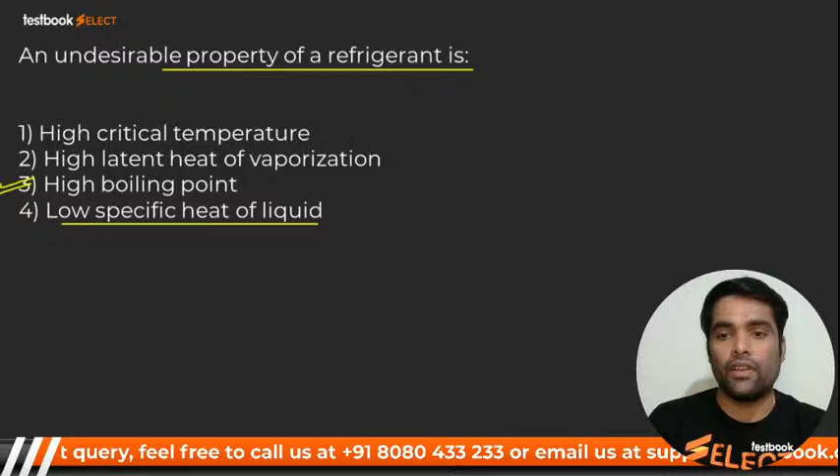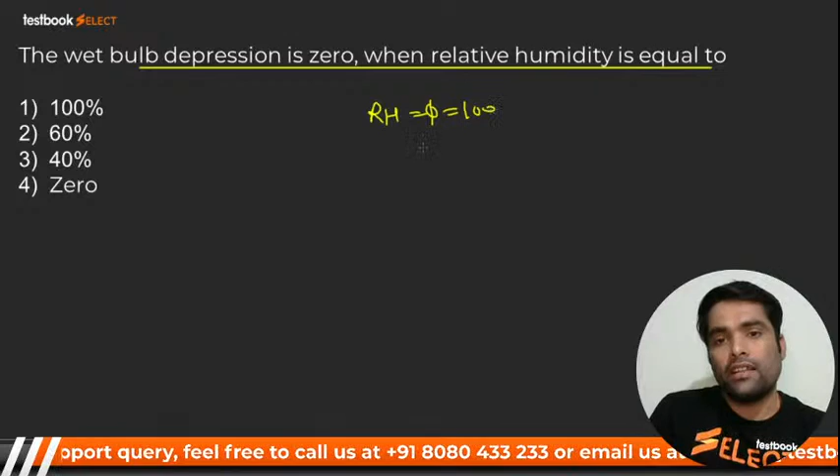Wet bulb depression is 0 when relative humidity is equal to, you know that, when relative humidity, that is phi, is equal to 100%, at that time dry bulb temperature is equal to wet bulb temperature, is equal to dew point temperature, DPT. And you know that wet bulb depression is nothing but the difference between dry bulb temperature and wet bulb temperature. So when your relative humidity is 100%, these both are equal, and you are getting WBD equal to 0. So it should be 100%. WBD will be 0.

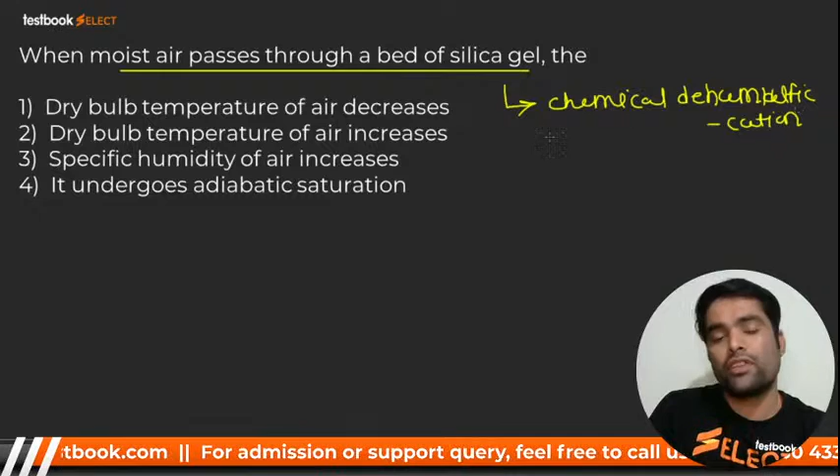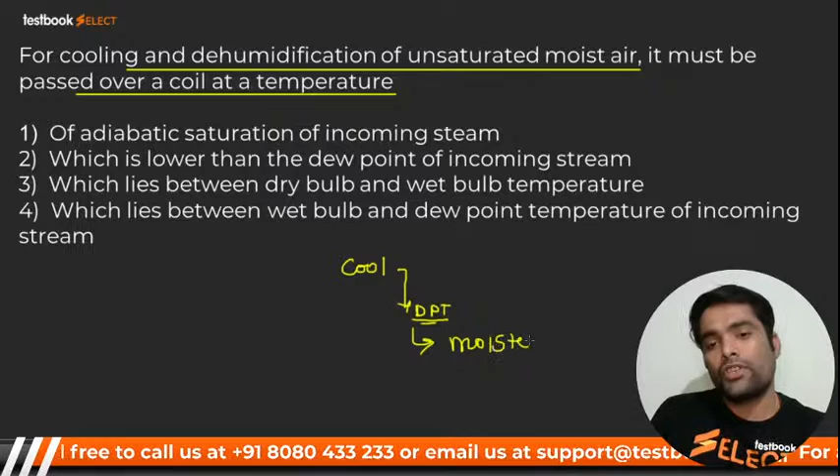You have to cool the air below dew point temperature. Why? If you cool the air below dew point temperature, the moisture will get separated. Moisture will start separation from dew point temperature. So if you cool it below the dew point temperature, you will get dehumidification. That is the answer which lies between, which is lower than that of dew point of incoming stream.

Very good. Here I go for next. Organic formula for refrigerant R12, it should be what?

You know that M-1 will be 0. And what about N plus 1? N plus 1 is 1. And you have the equation, that N, M, N and P. We have P. P is equal to 2.

N plus 1 is equal to 1, and P we have 2, right? Now you have Q. Q you can find out by N plus P plus Q is equal to twice M plus 2. Guys, yes or no? Had you got it? I hope you got it.

So N is 0. It is 2 plus Q is equal to twice M. M is 1, that is 2 plus 2, that is 4. You are going to get Q is equal to 2. So what should be your formula? C M H N F P Cl Q.

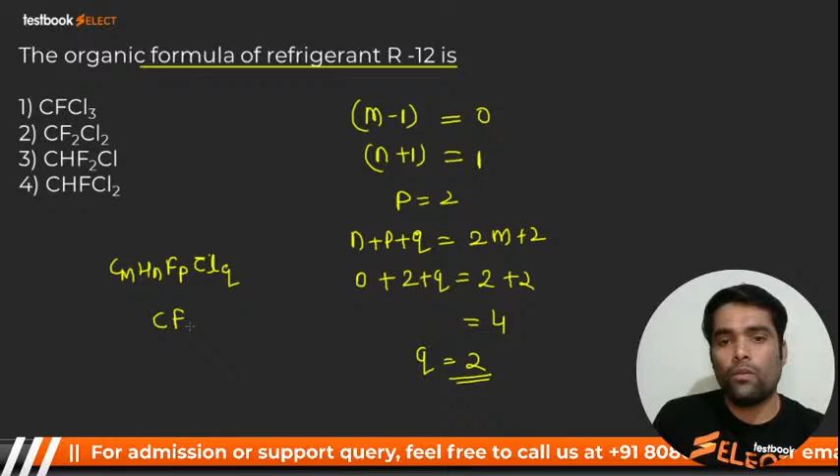C is what? M's value is 1, so C. H is 0, so there is no issue, H will be 0. N is 0, so no issue on that. And we have C F2, P value is 2. We have Cl, Q value is again 2. So our formula will be this one. Number 2. Very good.

Okay, we'll provide, don't worry. Domestic refrigerator, you are correct. Here we go for next.

In vapor compression refrigeration plant, the refrigerant leaves the evaporator. Evaporator means, you know this kind of diagram, I think there is no need of it, but still I'm drawing it. Right now bacha party, 1, 2, 3, 4. And it is evaporator, this is your evaporator. And this is condenser. So that is leaving evaporator, that means H1 is given, this is H1.

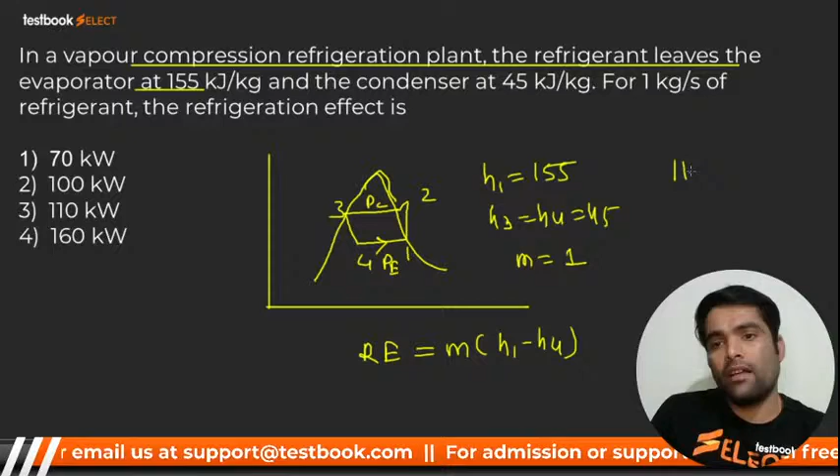Condenser and leaves the evaporator at this and condenser at 45. That means H3 is equal to H4 is equal to 45, for 1 kg. Mass flow is given 1 kg. So what is the refrigeration effect? Refrigeration effect will be nothing but mass flow rate multiplied by H1 minus H4. That will be 110. 110 multiplied by 1, that is 110 kilowatt.

I hope you got it. Very good, everybody. Here I go for next.

Oil separator is not required in refrigeration system if - when is it not required? Please listen, read the options very carefully. Refrigerant and oil are immiscible at all pressure and temperature. Refrigerant and oil immiscible at what, my dear? Condensation pressure and temperature, okay.

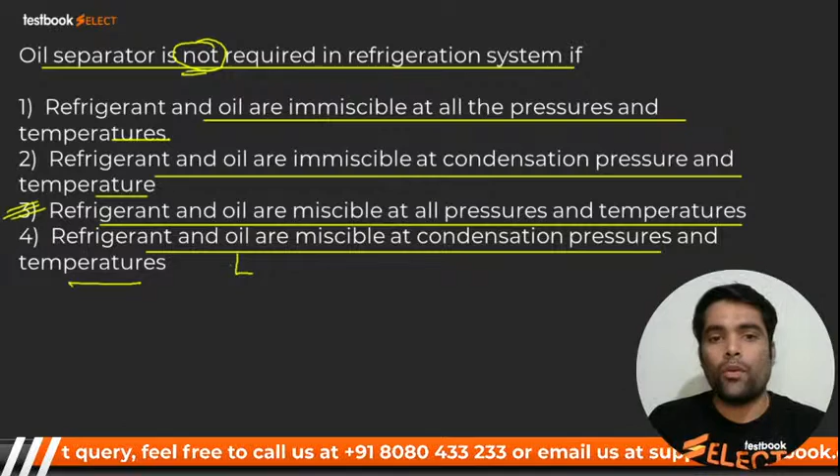I hope you got it. Here we go for next, my dear.

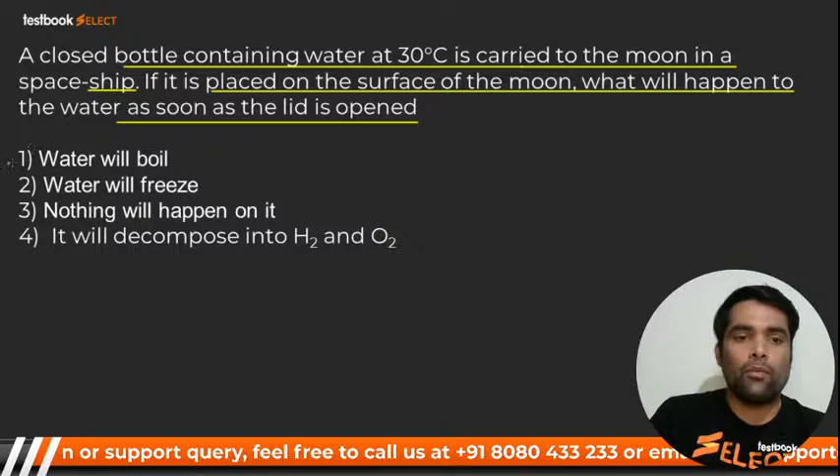Be fast, my dear. Very good, everybody answered correct - that water will start boiling. Water will start boiling, very good. Okay, here we go, it starts boiling. Very good, option number 1.

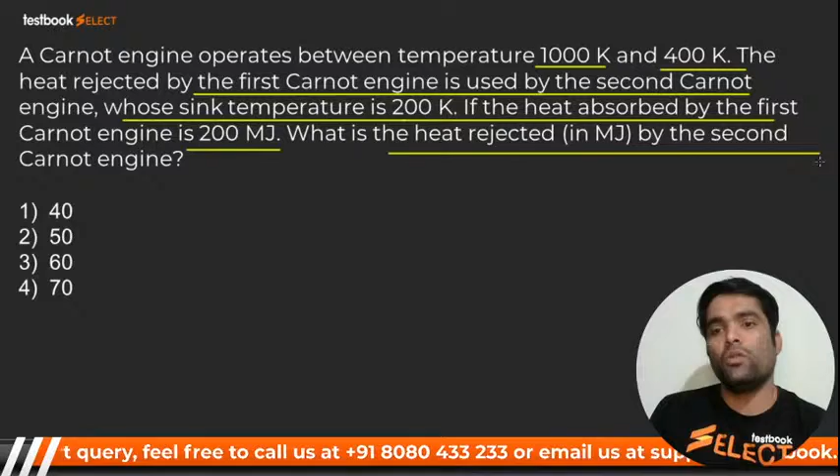Between what temperatures is it operating? This is 1000. A Carnot engine operates between two temperatures. The first Carnot engine's heat rejected is used by the second Carnot engine, whose sink is at 200. So the first temperature should be 1000, and this should be 400, and this should be 200. Heat coming in here should be Q1, then Q2 will come here with the engine in between, and here it should be Q3.

So can I write Q1 by Q2 is equal to T1 by T2, as it is a reversible engine. Q1 by Q2 is T1, which is 1000, divided by 400, that is 10 by 4, which is 2.5. Now, the first Carnot engine's heat absorbed is 200 megajoule, so Q1 is 200. 200 divided by 2.5 gives Q2. If it were divided by 25 it would be 8, so here it means 80. Q2 comes out to 80, so 80 has been supplied.

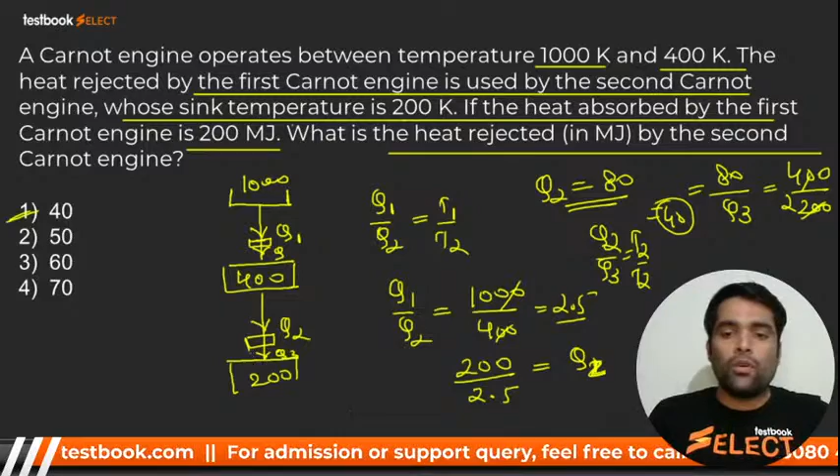Two spheres A and B of the same material, having radii 1 meter and 4 meter, and given temperatures. Which one of the following statements is correct? The energy radiated by sphere A is greater than...

Let me check, the answer is C. EA is sigma epsilon A T raised to power 4, so EA is directly proportional to A, and A is directly proportional to R square. So EA depends on R square and T raised to power 4. Similarly B will be R square T raised to power 4. So calculate EA by EB: RA is given as 1 by 4, squared, multiplied by temperature 4000 by 2000 raised to power 4. That gives 2, so it will be 16. It comes to 16, and for the other sphere it is also 16, so it should be equal to that of sphere B. Very good.

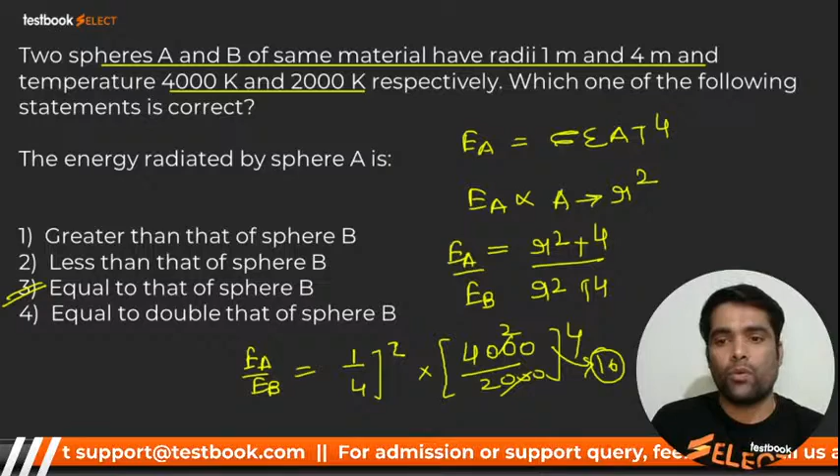Okay, definitely will provide. I'll try to provide that. Third will be equal. Okay, here I go for next.

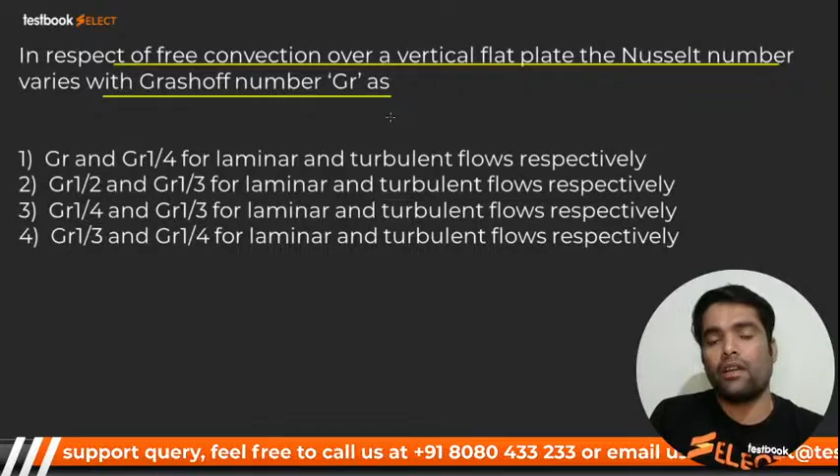In respect of free convection over a vertical flat plate, the Nusselt number varies with Grashof number as what, my dear? Nusselt number is nothing but C (GR PR) raised to power M. And this M is 1 by 4 for laminar flow, and M is equal to 1 by 3 for turbulent.

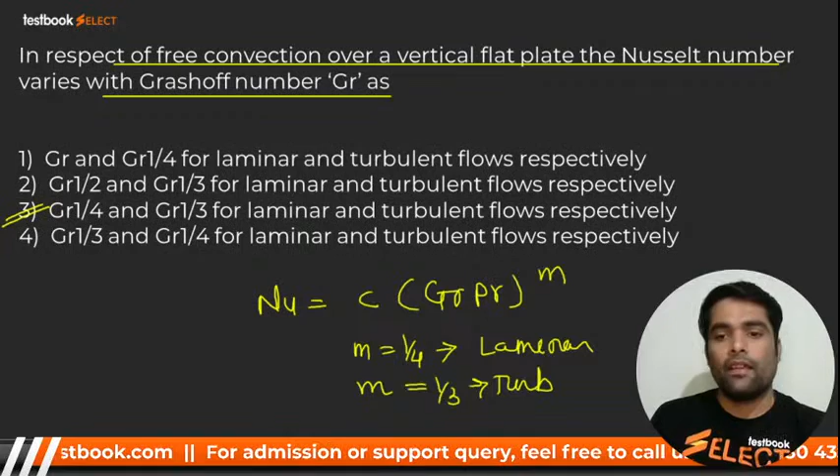So Grashof number किसके लिए बोला है? In respect of convection over a vertical flat plate, Nusselt number varies with GR raised to power 1 by 4 for laminar, and for turbulent, this one. Number 3 is correct. Very good, everybody. If you know the formula, you can crack the question.

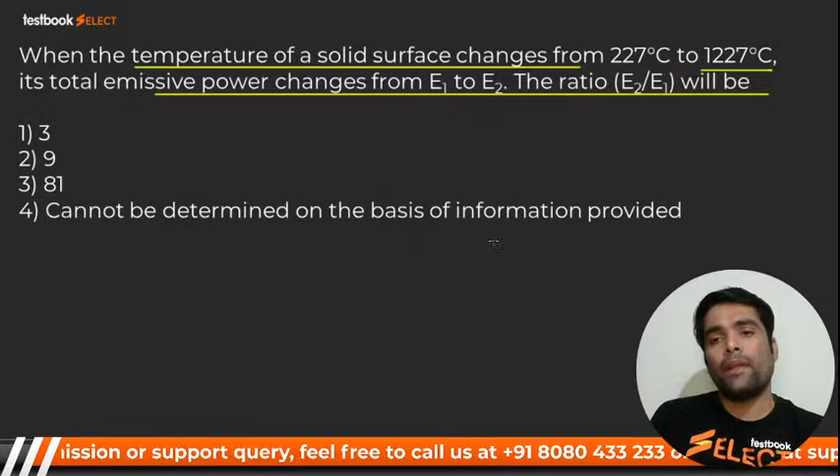When the temperature of the solid surface changes from 227 to 1227, its total emissive power changes from E1 to E2. The ratio E2 by E1? 1227 plus 273 is 1500. E is directly proportional to T raised to power 4. And 227 plus 273 is 500. 1500 by 500 is 3, and 3 raised to power 4 is 81. So E2 by E1 will be 81. Everybody is correct. Very good.

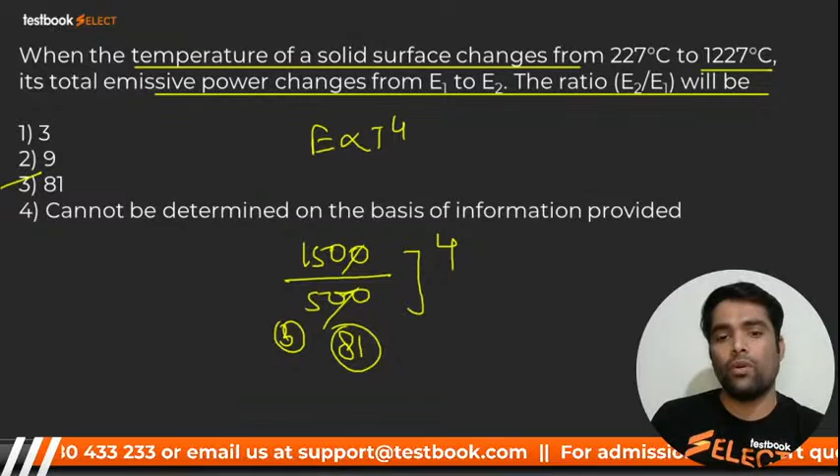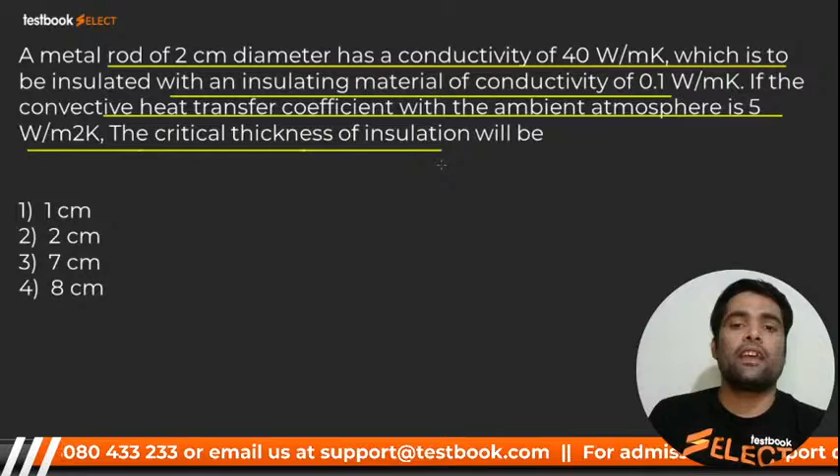Metal rod of 2 cm dia has a conductivity of 40 watt per meter Kelvin, which is to be insulated with an insulating material of conductivity 0.1. If the convective heat transfer coefficient with the ambient atmosphere is 5, the critical thickness of insulation for a cylinder: it should be K by H. K is 0.1, H is 5. कितना हो जाएगा बच्चा ये? Guys, yes or no?

It should be 0.02 meter. That means 2 centimeter. But they have asked critical thickness. So I have to minus the radius: 2 minus 1, that will be 1 centimeter. It's not 2 centimeter. They have asked critical thickness of insulation, so 1 centimeter is the correct answer. Here I go for next.

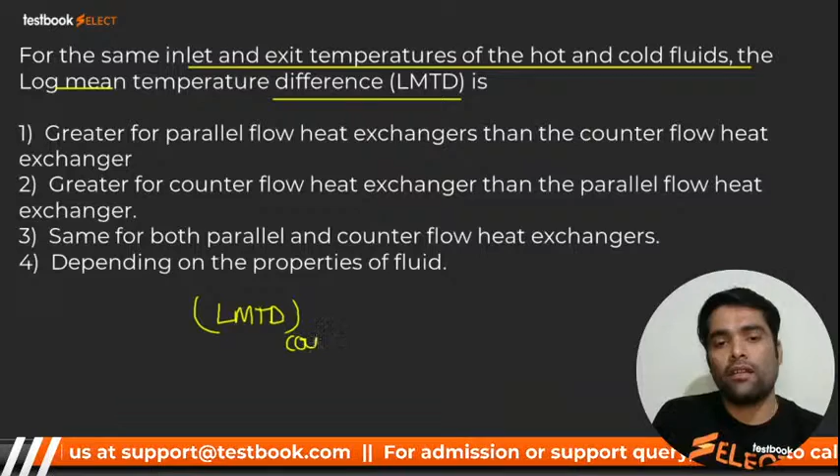For the same inlet and exit temperature of the hot and cold fluids, the log mean temperature difference, LMTD, for counter flow is greater than cross flow heat exchanger, and greater than parallel. Parallel का सबसे कम होता है. So it is greater for the counter flow heat exchanger than parallel flow heat exchanger. Number 2. Very good, dear. Here I go for next.

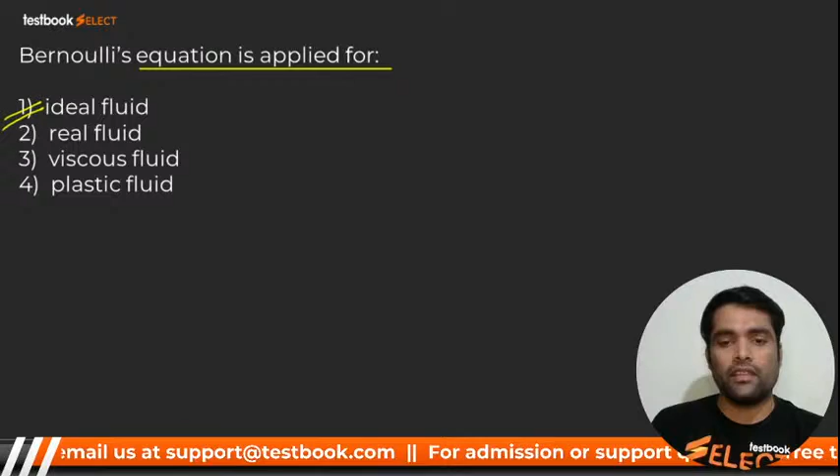Here I go for next, my dear.

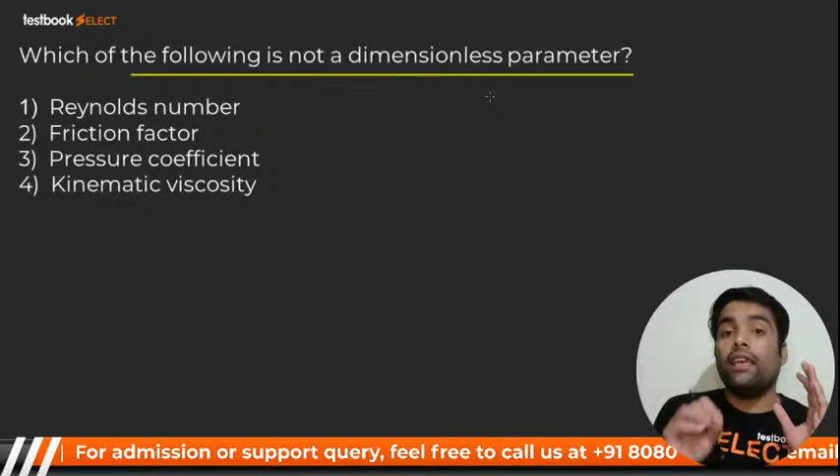Reynolds number is dimensionless, friction factor is dimensionless, pressure coefficient is also dimensionless, right, my dear? Kinematic viscosity, you know that it has dimension: meter square per second, right? So the option will be number 4. I hope you're getting it. Very good, Jaswant.

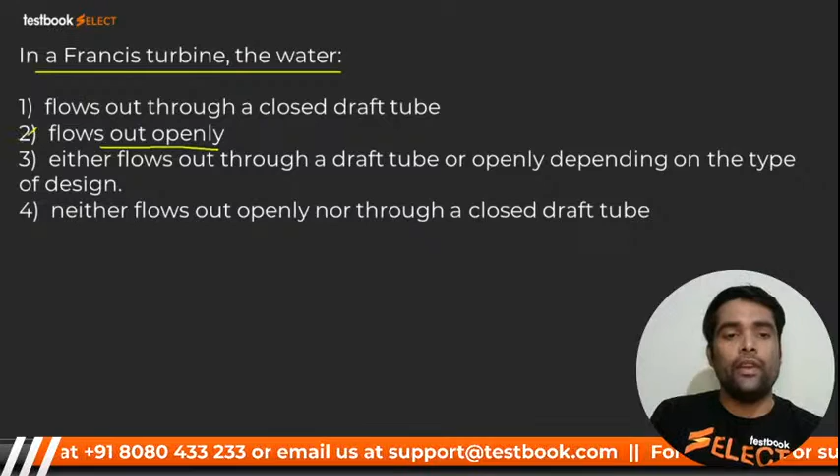In a Francis turbine, the water flows out through the closed draft tube, or flows out openly? It's not possible, because it has some pressure, and that we have to convert. Either flows out through the draft tube or openly, depending on the type, or neither. It should be none other than number 1. Yes or no? Guys, please tell me.

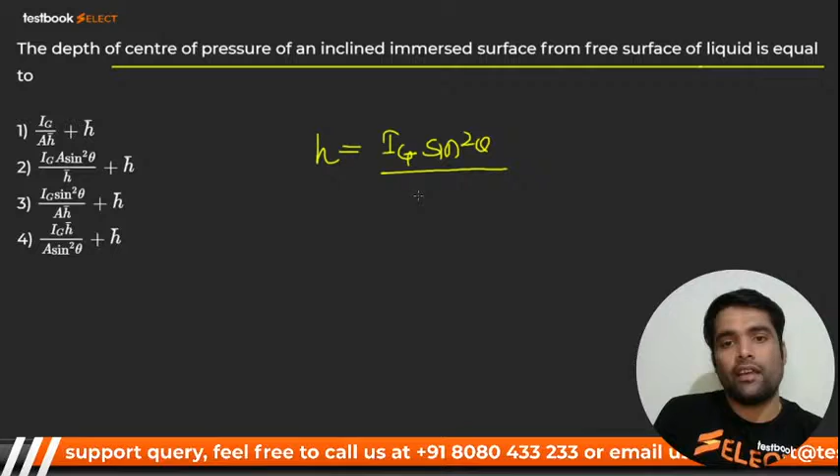The depth of center of pressure of an inclined immersed plane surface from free surface of the liquid. It is none other than what, my dear? H is equal to Ig, that is moment of inertia, multiplied by sin square theta, divided by A h bar, plus h bar, the center of gravity distance, right? So it should be none other than this one.

And when surface is vertical, that means theta is equal to 90. So at that time it will become Ig upon A h bar plus h bar, right? It is for vertical surface, because here they have mentioned inclined. I hope you got it, beta. Very good. Here I go for next.

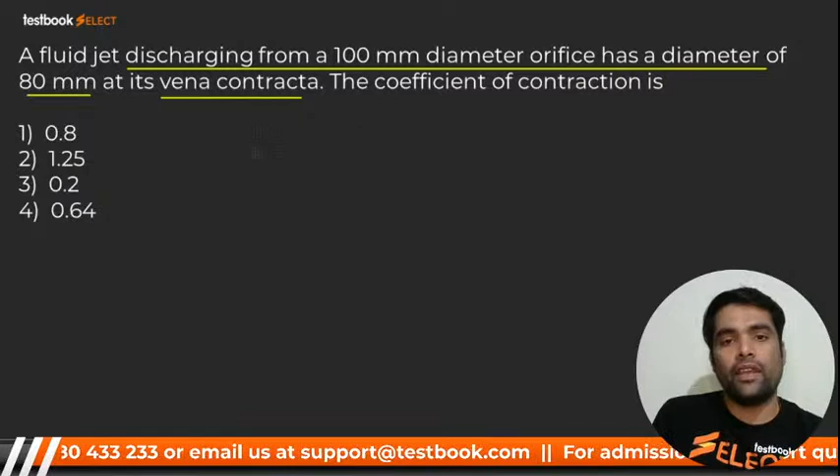Fluid jet discharging from 100 mm dia orifice has a diameter of 80 mm at its vena contracta. The coefficient of contraction? Cc will be actual area divided by the area, where vena contracta occurs is the actual, right? So pi by 4 d square, 100 square, and pi by 4 into 80 square. Tell me the answer. Guys, be fast. 1.25? What should be the answer?

Have I done a mistake? Let me check. We have done a mistake over here. Vena contracta area we have to take in the numerator; we have taken opposite of it. So sorry for that. It is pi by 4 into 80 square divided by pi by 4 into 100 square. Now you're going to get around 0.64. I have taken opposite, so sorry for that.

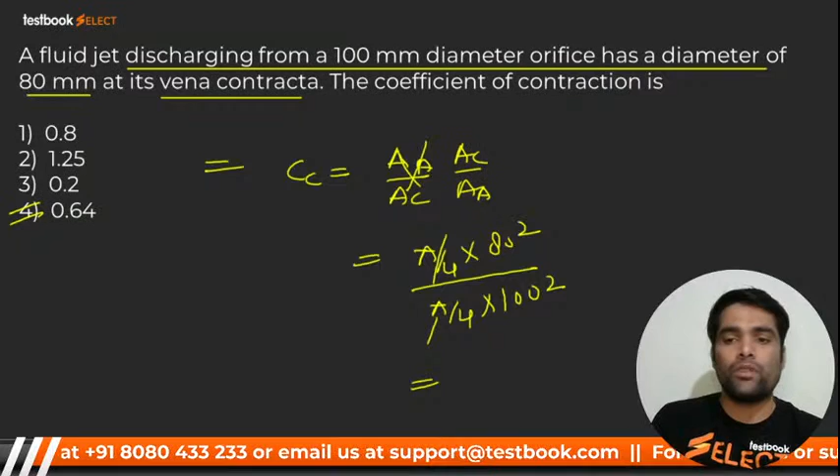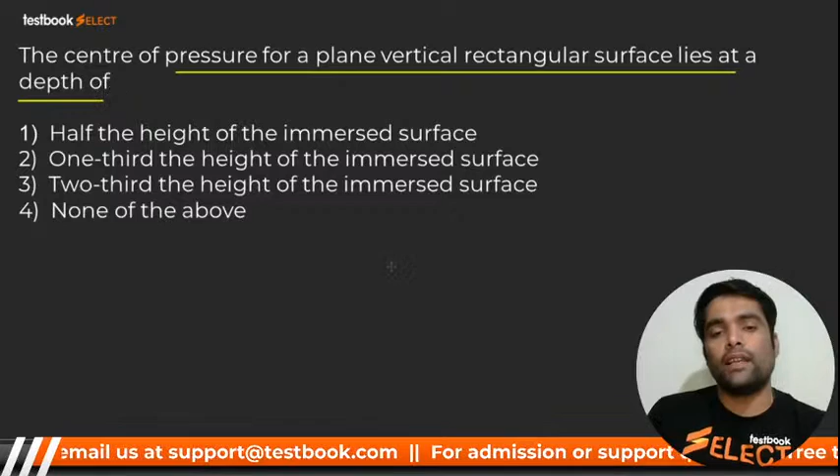Center of pressure for a plane vertical rectangular surface lies at depth of what, my dear? 2/3 of the height of the immersed surface, right? Not 1/3, 2/3. Option 3. Very good. Here I go for next.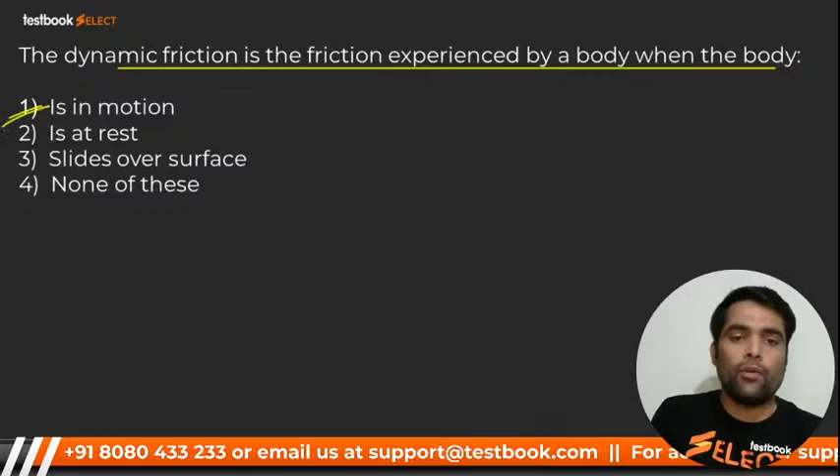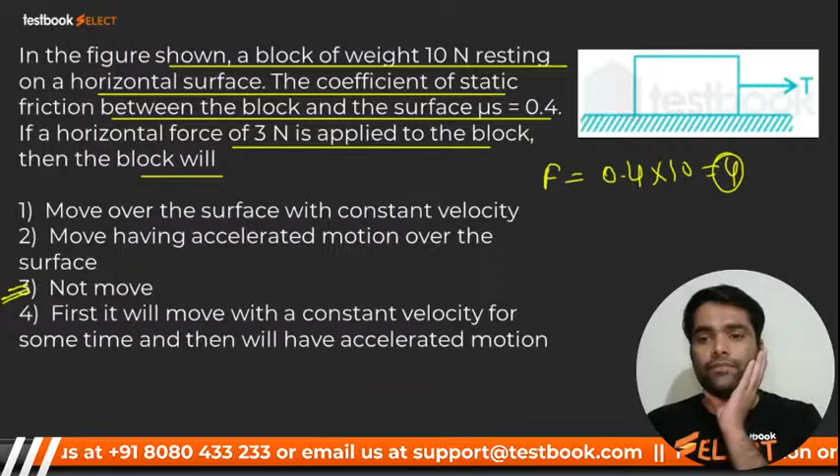So if it is 4 Newton, my dear, then we have to apply a force equal to or more than 4. But they have applied 3. So how could it move? It will not move. Number 3 is correct. Very good. Here I go for next.

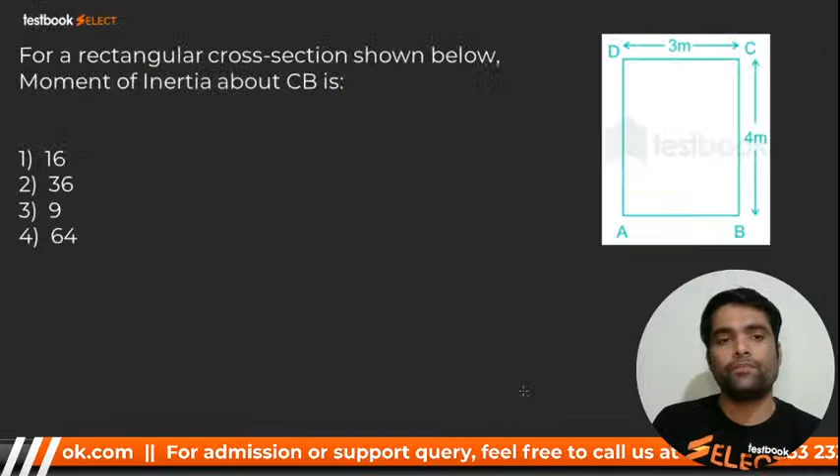For a rectangular cross-section shown below, moment of inertia about CB. So we have to apply the parallel axis theorem. First we take it about the center of gravity: BD cube by 12. So 3 into 4 cube divided by 12, plus area, 3 into 4, multiplied by the distance from the center of gravity, per the parallel axis theorem.

So it should be 3 by 2. Sorry, distance square, that is 3 by 2 square, right? So it will be 16 plus, 4 will get cancelled out, 9 into 3, that is 27. So what is the answer coming? Something went wrong, because there is no such option.

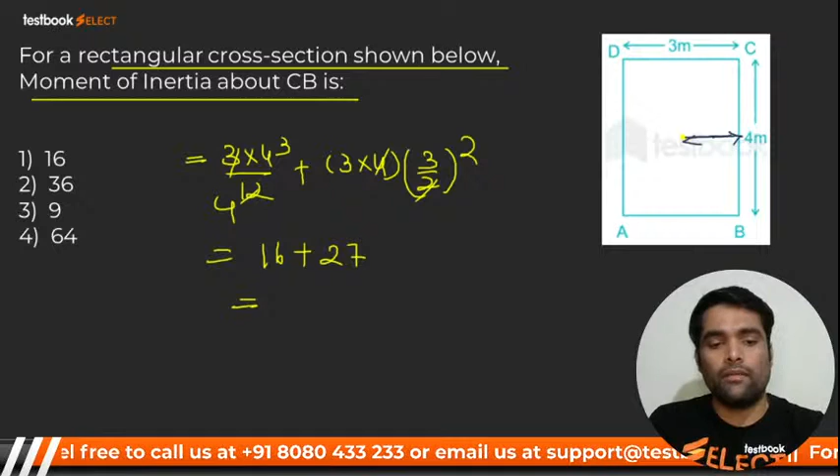Guys, what answer are you getting? 33? 9? Guys, what should be your option? Please tell me your answer. Be fast. 36, right? Oh, I have done a mistake. It will be the cube of 3, kids. I have taken it opposite.

It is of 3 cube, right? It will be like a rectangle. We have to apply like this. I had applied it taking it as vertical. We will apply it like this. So it will be what? Base. Depth will become what, my dear? 3. Right now, this distance now. So definitely we will apply it like this. So it should be B into 3 cube divided by 12 plus area, that is 3 into 4, multiplied by distance square. That is what, my dear? 3 by 2 square. Right?

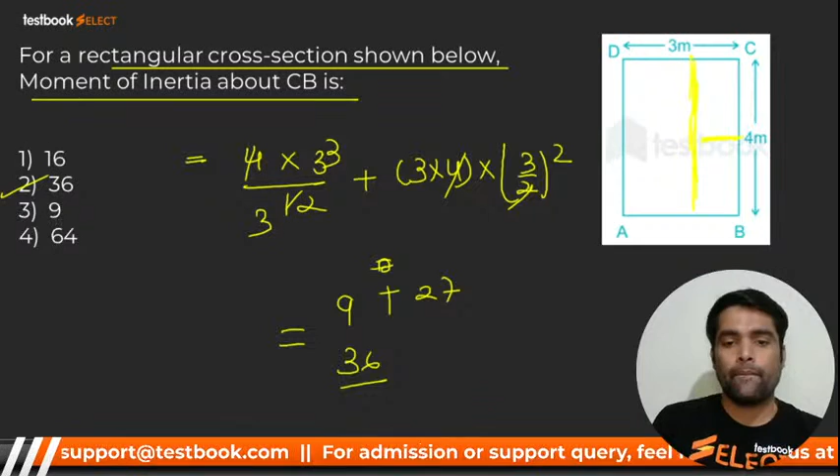Now this will get cancelled. Right? My dear, we are left with what? This will be what? Plus square 27. Here we are going to get, my dear, 3. So here we have 9 only. Right? So it should be 36. 36 will be correct. Here I go for next. Parallel axis theorem we have applied over here.

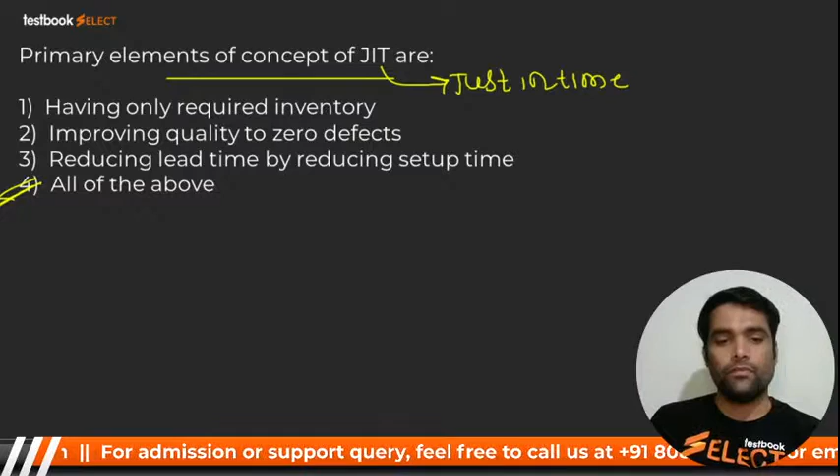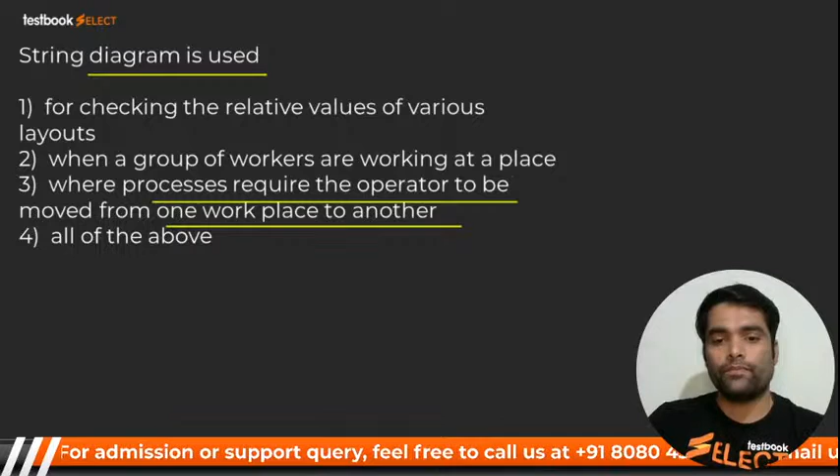String diagram is used for checking relative values of various layouts, when a group of workers is working at a place, where the process requires the operator to be moved from one place to another place. All are correct. All of the above. Guys, be fast. Bacha party, be fast. Tell me the answer for this one. Yes, it is none other than all are correct. Very good. Everybody is correct. That's great.

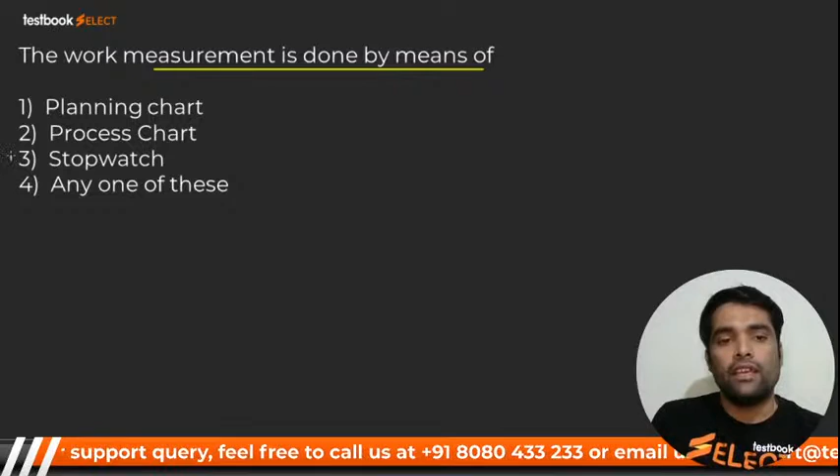Work measurement is done by means of planning chart, process chart, stopwatch, any of these. The work measurement is done only by means of stopwatch. Stopwatch, very good, correct option.

Car wash shop, arrival rate 6, service rate 10 per hour. Find the waiting time in queue. Please tell me the formula for it. It should be lambda upon mu into mu minus lambda. So lambda is what, my dear?

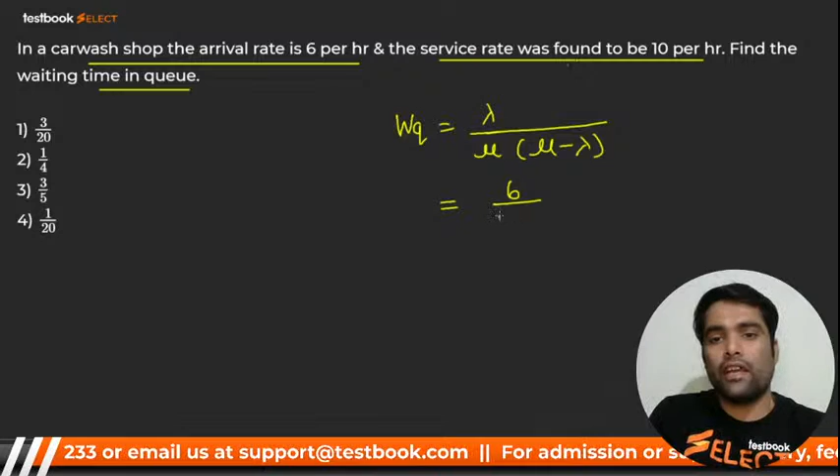Lambda is 6 per hour, mu is service rate 10. So 10 minus 6 should be 4. 6 by 10 into 4 should be... it should be 2, so it should be 20. So right now it is 20, so it should be 3 by 20. Very good, not 3 by 5, 3 by 20 is there.

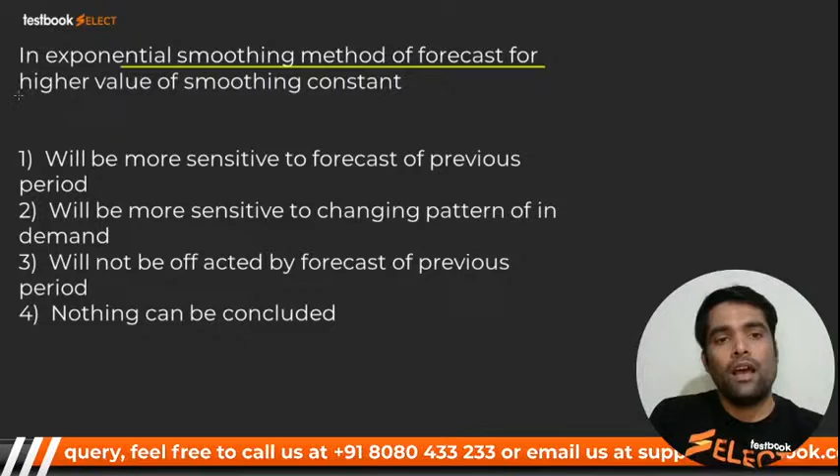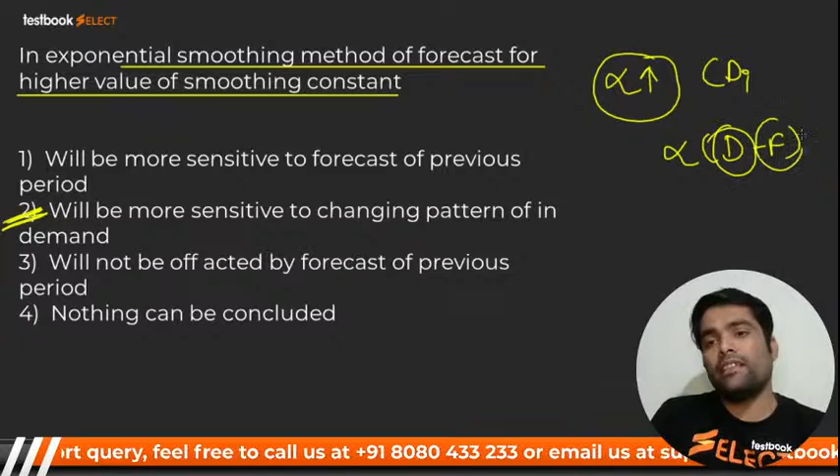Exponential smoothing method of forecast - higher value of smoothing constant will be what? If alpha is higher, it will definitely be more sensitive to change in pattern of demand. Because it has been multiplied to the error, D minus F - demand is actual demand, F is the forecasted value. So the change in that will be taken care of by alpha. Here we go for next.

The bolt of uniform strength, shank diameter is made equal to major dia, pitch dia, minor dia, or nominal dia. Be fast, which one is correct? You have to be very fast, then only you are going to meet the requirements of the examination, otherwise people will attempt all questions and you will be left with only 3-4 questions. Very good everybody. The answer is minor dia of threads.

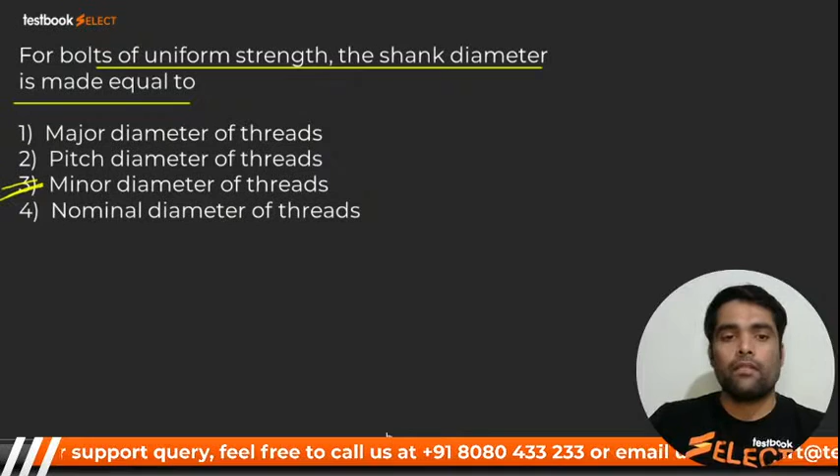Made equal to minor dia of threads - I repeat, minor dia of threads. Please read the question very carefully and then answer. Tapered roller bearing can take both radial as well as axial loads.

Very good, Srinivas Raghavan, very good. Both, Jaswant, very good. Here we go, my dear.

If the tearing efficiency means P minus D by P, it is given as 0.5. Then they have ratio of rivet hole diameter to pitch, that is D by P. So I'll get D by P is 0.5, as it is 0.5.

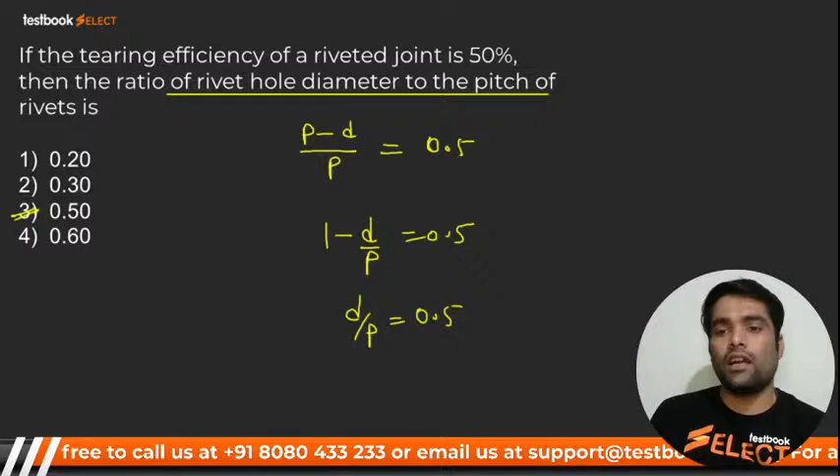Yes, third one, very good. Third one will be correct. Here I go for next.

Single parallel fillet weld of length L and weld size is subjected to tensile load P. Will have what design stress? You know that P allowable load is 0.707 multiplied by length into H into tau max. So tau max will be P upon 0.707 LH. So it should be none other than number 3.

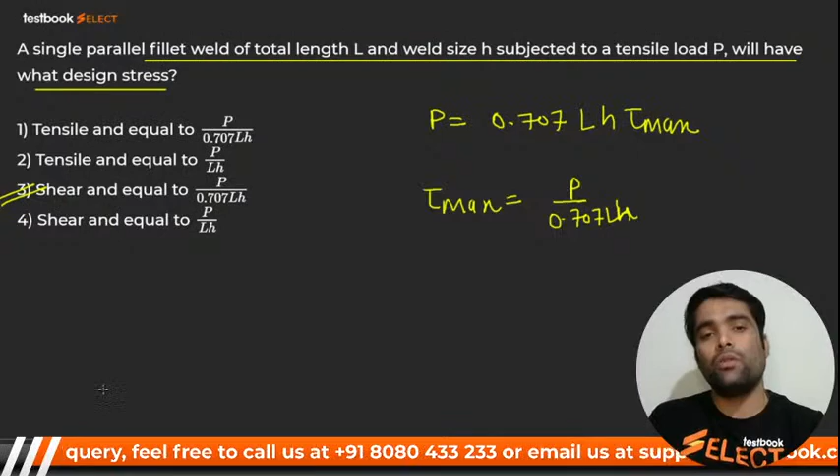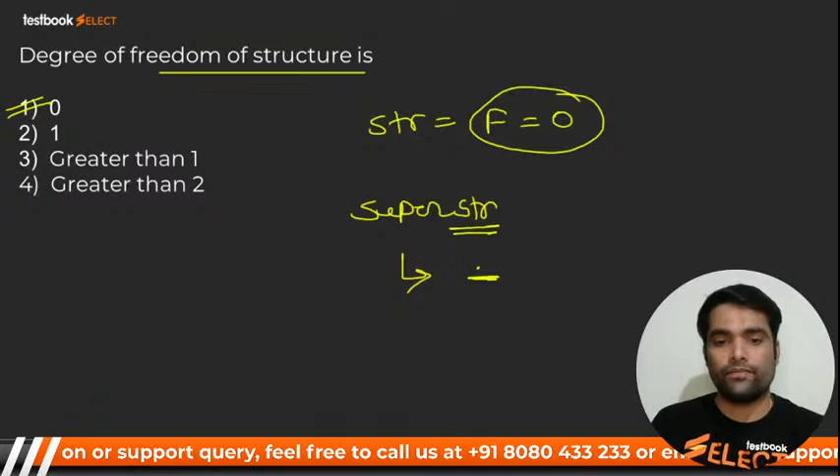Everybody is correct. Here I go for next.

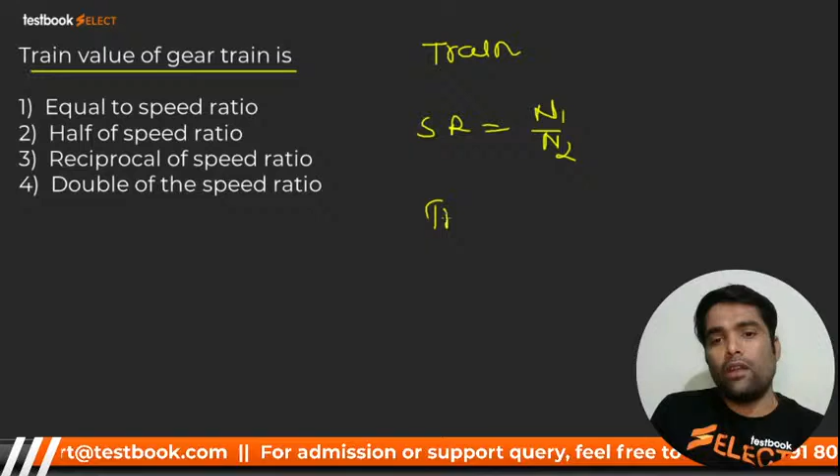Train value is nothing but what, my dear? We have speed ratio, that is nothing but driver upon driven. And what is train value of it? Train value will be N2 upon N1, driven upon driver. So it is nothing but 1 upon speed ratio, that is the reciprocal of speed ratio.

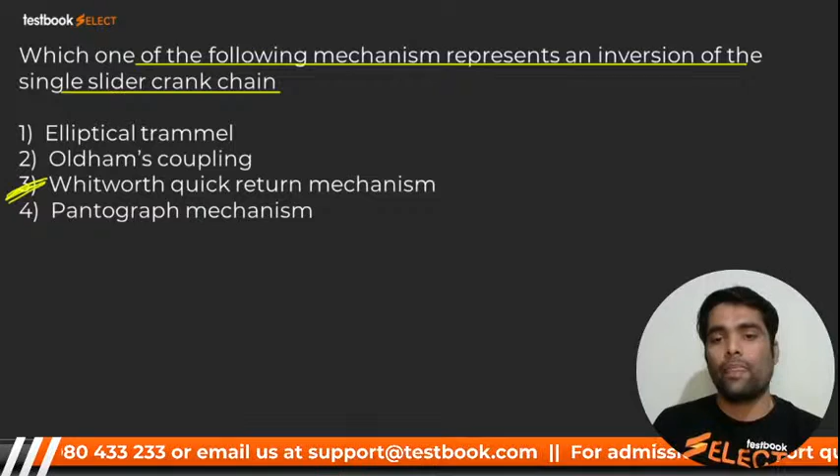Which one of the following mechanism represents an inversion of single slider? Remember, elliptical double, Oldham double, Whitworth quick return, yes it's correct. Whitworth quick return motion mechanism is nothing but inversion of single slider mechanism. Remaining are double slider. I hope you got it, picture. Everybody answered correctly, that's great.

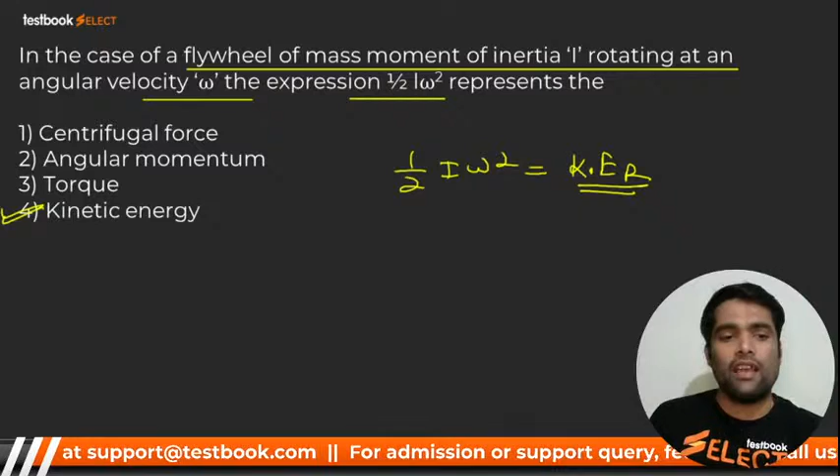These are nothing but one-liner questions. That means if you know the formula, you can get it. Otherwise, you have to struggle, right?

For a Hartnell governor, the loads on the spring at lowest and highest equilibrium speeds are 1200 Newton and 50 Newton respectively. If the height of governor is 1.5 centimeter, you have to find out the stiffness.

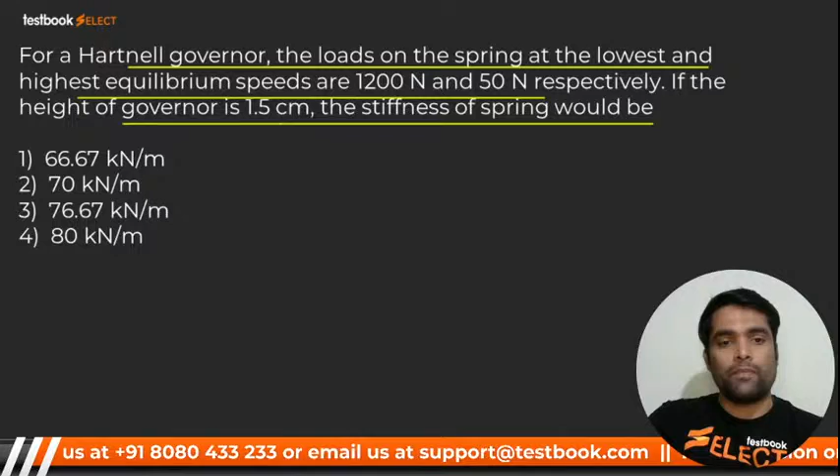That is stiffness of the spring, my dear. Please tell me, be fast. Guys, be fast, please tell me the answer for it. Yes, what it should be? क्या होना चाहिए? It should be none other than sleeve movement.

So it should be what, my dear? कितना आ रहा है? It is how much? 76.67. It is 76.67 kilo Newton, it will come around this.

किलो न्यूटन मीटर आ रहा है। It should be in न्यूटन मीटर। अभी किसमें आएगा ये, न्यूटन मीटर में आएगा। You have to convert it into kilo Newton meter. So answer will be this one. Guys, had you got it? Very good.

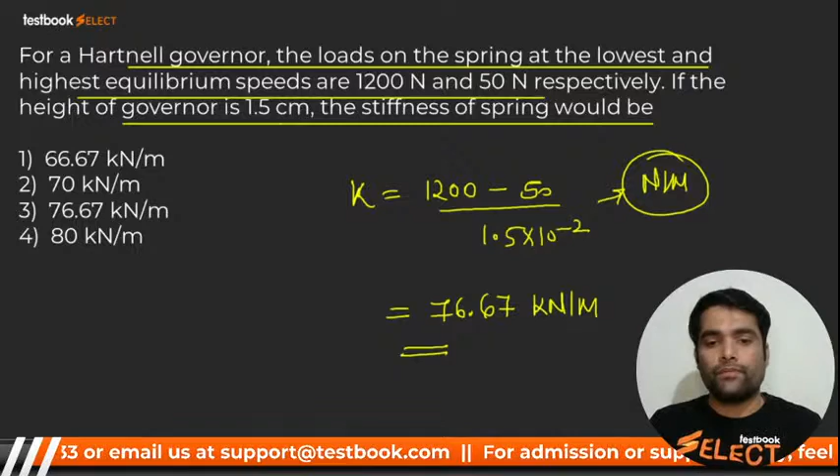When shaft with dia D is subjected to pure bending, you know that pure bending, axial loading, the bending stress sigma B induced will be M by Z. And you know that Z is equal to, for shaft it should be none other than pi by 32 into D cube. So what should be the option? This one.

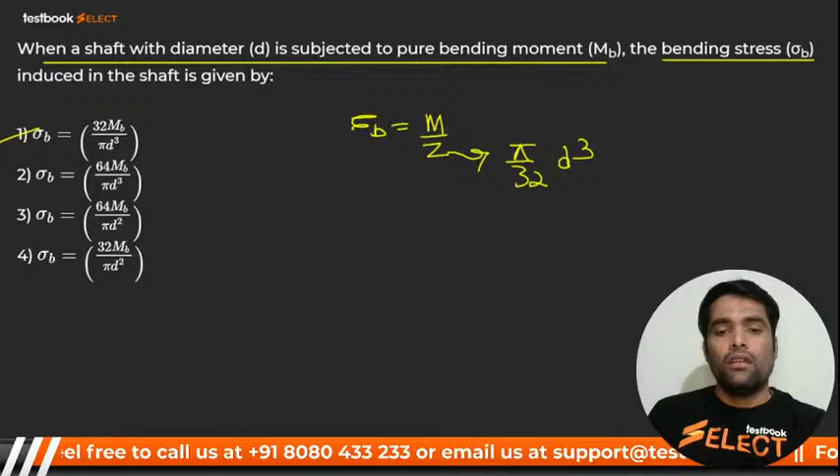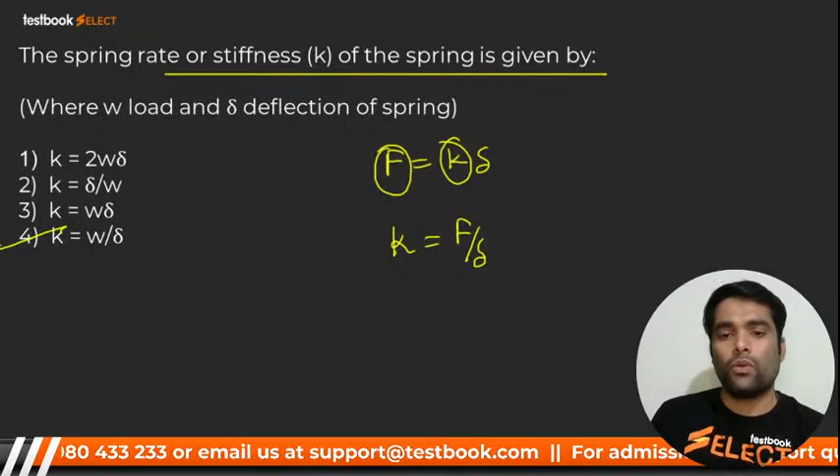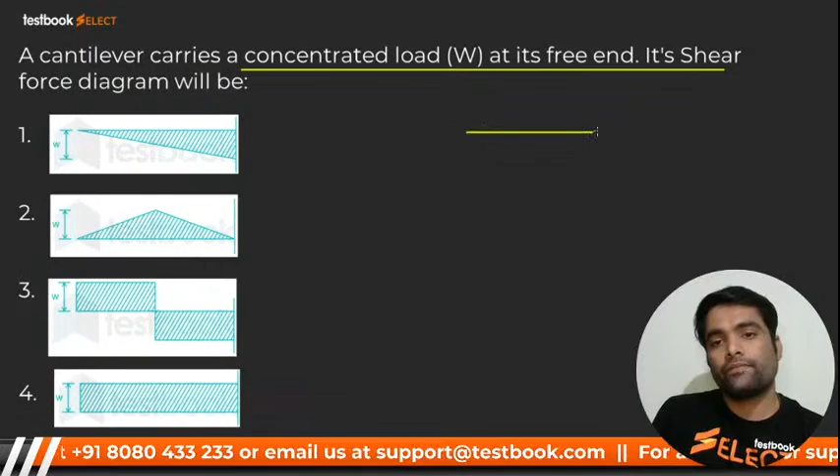A cantilever beam carries a concentrated load W at its free end. Now you have to tell me its shear force diagram. So definitely its shear diagram will be like this one, a rectangle. Yes or no? Yes. So option number 4. Very good, everybody. Here I go for next.

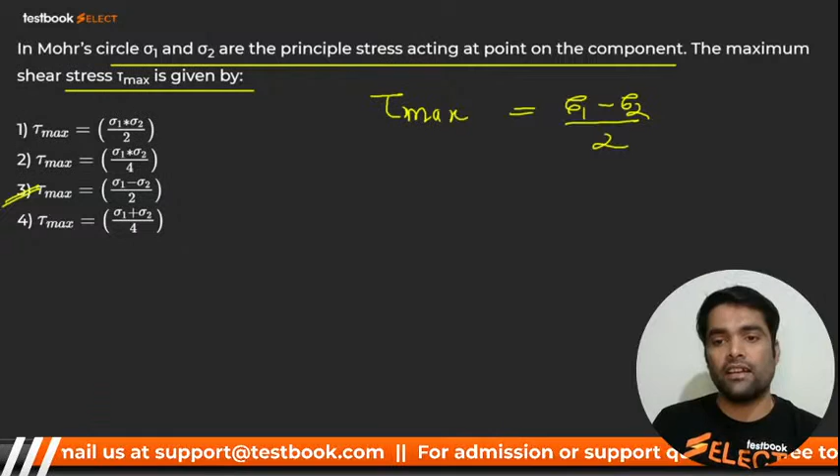Mohr circle: sigma 1 and sigma 2 are principal stresses acting at a point on a component. The maximum shear stress tau max is given by? You know that tau max is nothing but the radius of Mohr circle, represented by sigma 1 minus sigma 2 by 2. Yes or no? Very good, beautifully done. Third is correct. Here I go for next.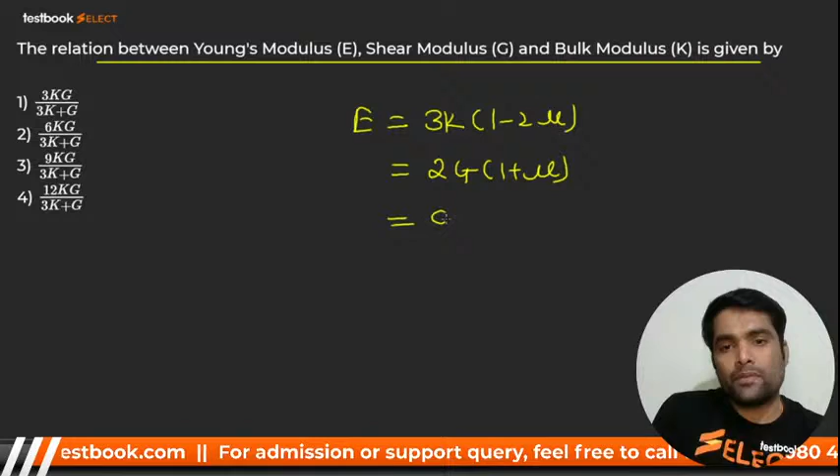The relation between Young's modulus E, modulus of rigidity G, bulk modulus K. You know that E is equal to 3K(1 minus 2 mu). Another expression is 2G(1 plus mu). Another expression is 9KG upon 3K plus G. These three equations are there. Which one is correct? Option number 3 is correct. Very good, beautifully done.

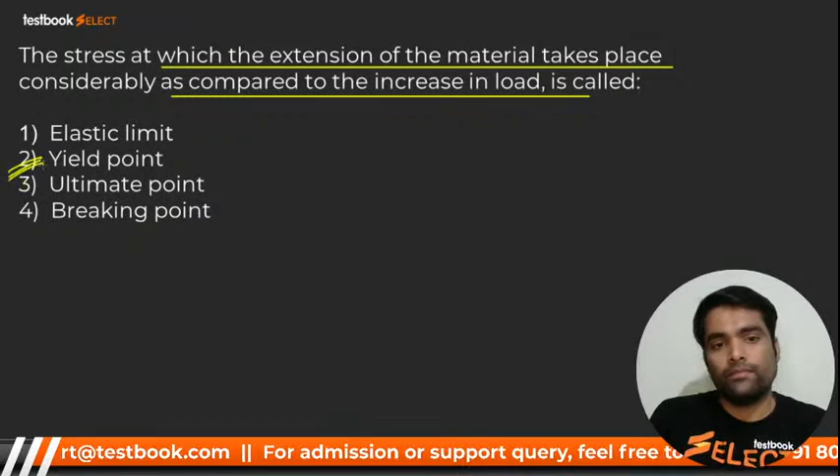The stress at which the extension of the material takes place considerably as compared to the increase in load is called elastic limit, yield point, ultimate point, breaking point? It is none other than yield point. Yielding point is correct. Very good. Mukesh, very good. Kamal Prakash, very good. Here I go for next.

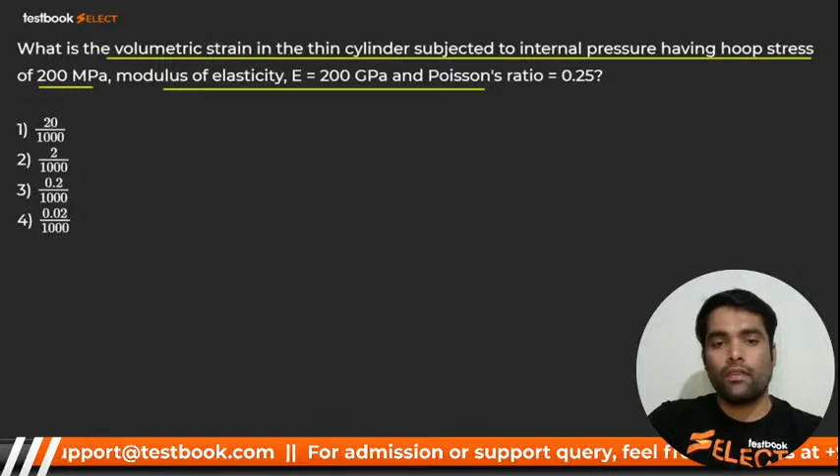What is the volumetric strain of a thin cylinder subjected to internal pressure having hoop stress 200 megapascal? Modulus of elasticity is this one, and Poisson's ratio is 0.25. You have to tell me the volumetric strain. Formula you know: sigma h by E into 5 by 2 minus 2 mu. Yes or no? That is the formula to calculate volumetric strain.

So sigma h is given, 200, over 200 into 10 raised to power 3 because E is in gigapascal. 5 by 2 minus 2 into Poisson's ratio 0.25. This gets cancelled out, 1000 is there. 5 by 2 minus 0.5, that is 4 by 2. Guys, final answer? It is 2 by 1000. Very good.

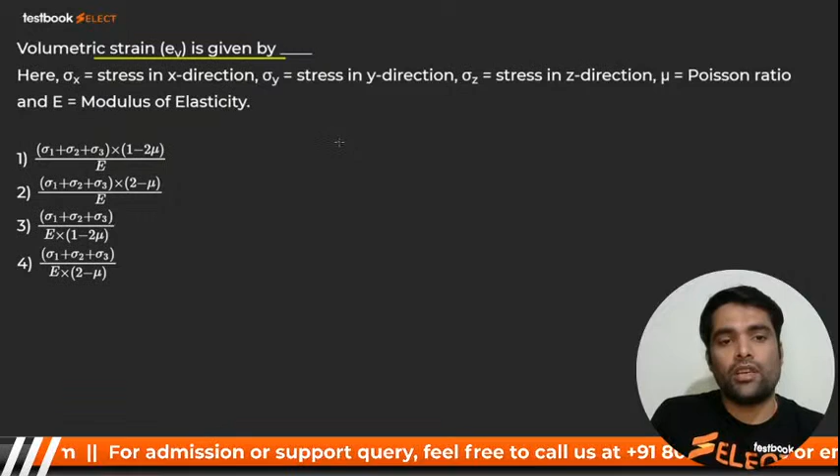Volumetric strain eV is given by? Can you tell me, bacha party? It is none other than 1 minus 2 mu by E into sigma x plus sigma y plus sigma z, or you can say sigma 1, sigma 2, sigma 3. So this one, number 1 is correct.

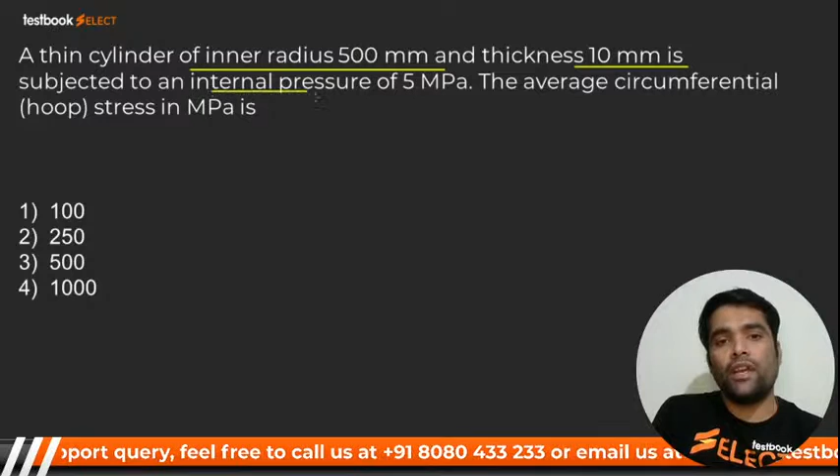Here we go for next. Thin cylinder of inner radius 500 mm, thickness 10 mm is subjected to an internal pressure 5 megapascal. The average circumferential hoop stress in megapascal. You have to calculate, my dear, hoop stress, sigma h. Guys, what is this one? This is nothing but PD by 2T. Put the value, get the answer.

And what is the value? Please let me know. Value will be 250. Kitna aa rahi hai bacha party? It should be 250. 250 will be the correct option. It should be second one. Second, 250 is correct option. Very good. Here I go for next.

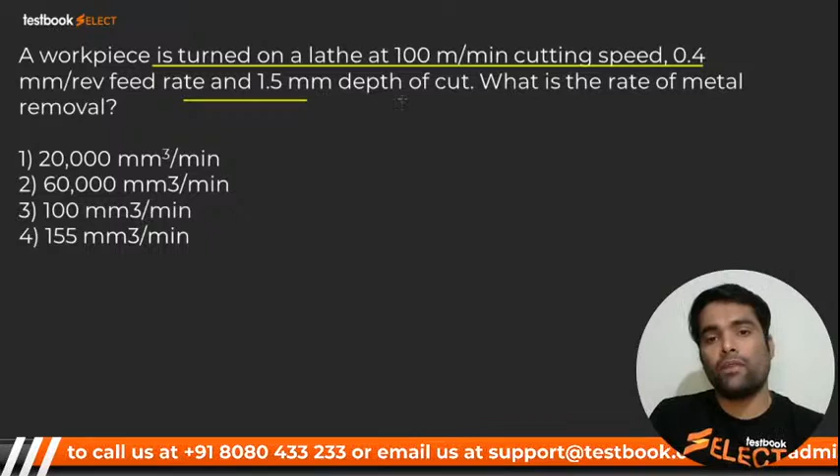Workpiece is turned on lathe at 100 meter per minute cutting speed, 0.4 mm per revolution feed, and 1.5 mm depth of cut. What is the material removal rate? You know that, V into f into d, MRR. Velocity is 100 meters per minute, so convert it into mm per minute, right?

So 100 into 10 raised to power 3, feed is 0.4, multiplied by 1.5. That will be equal to 60,000 mm cube per minute. Yes, 60,000 is correct option. Here I go for next.

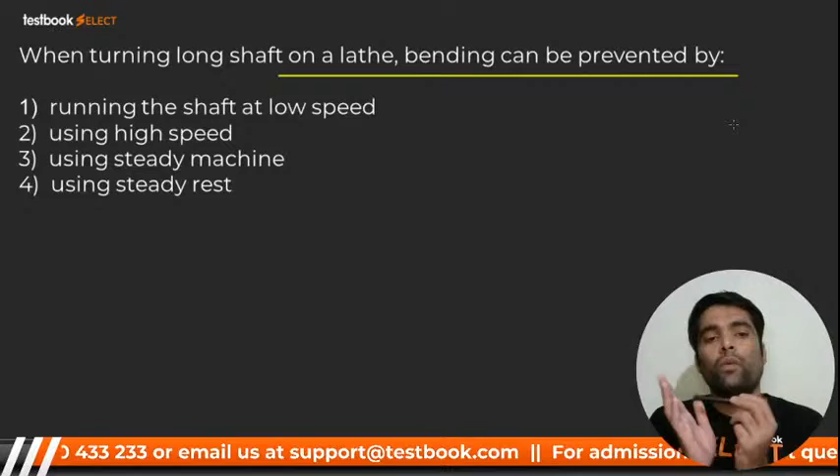When turning long shaft on a lathe, bending can be prevented by... When the shaft is too long and you have to do turning in a lathe machine, then we require a steady rest, so that we can avoid the bending of the shaft. So it is none other than using steady rest. Very good.

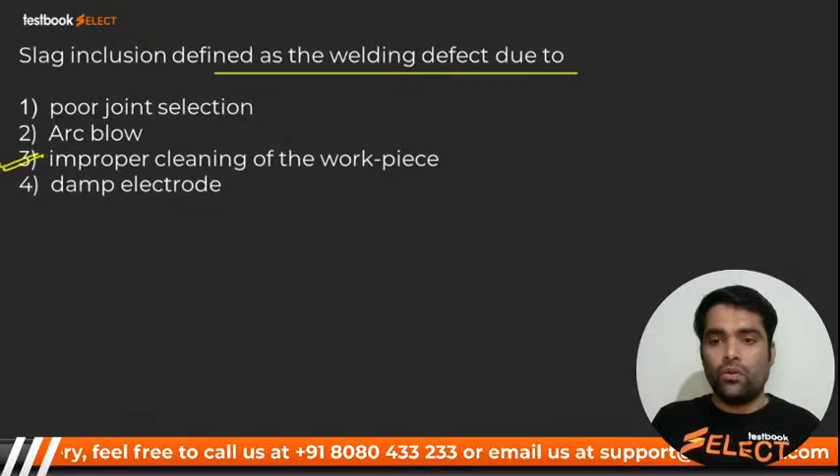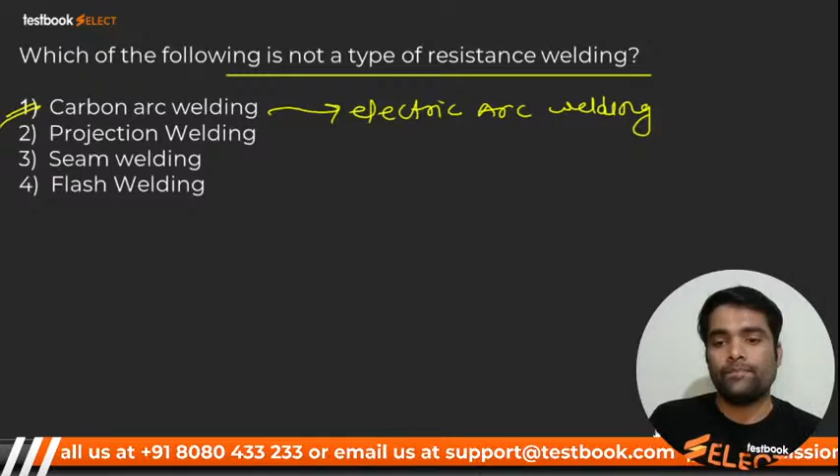No, don't retract your comments. Once you have made the mistake, don't retract that particular comment. Okay.

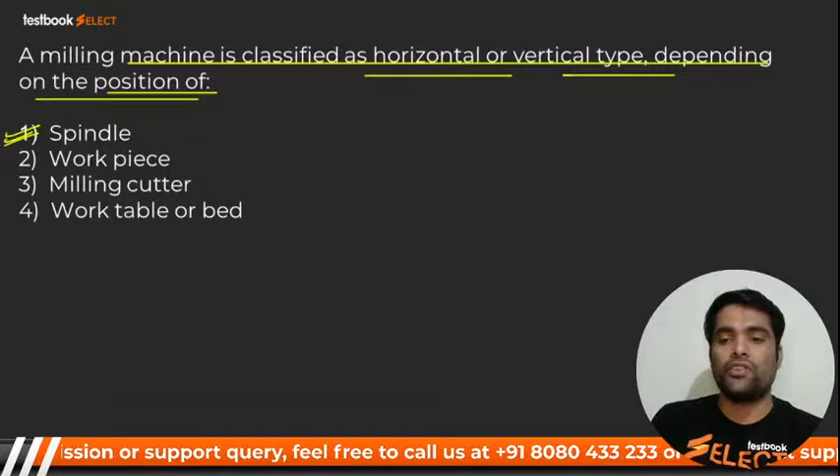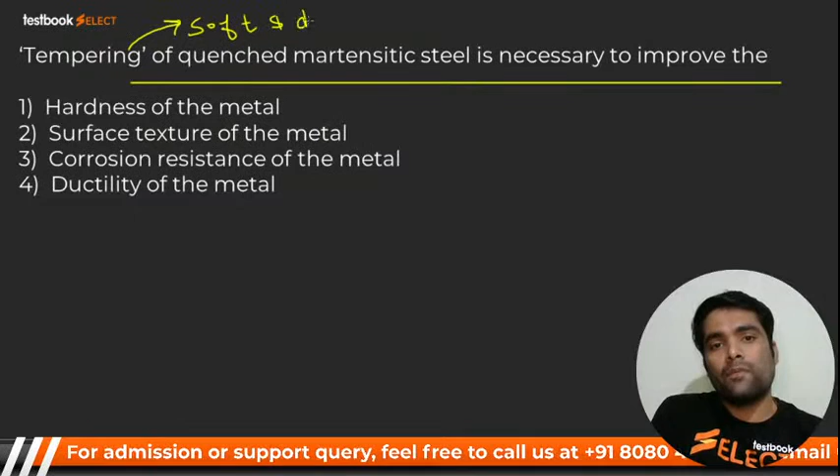Tempering of quenched martensitic steel is necessary to improve the what, my dear? Hardness of metal? No, tempering makes the material soft and ductile. So what should be the option? Ductility of material. Fourth one. Here I go for next one. Okay.

Which one of the following machines is superior to the other machines, my dear? Which machine among these is quite superior to the remaining three? None other than what, my dear? Milling machine. Very good. It should be milling, because accuracy is quite high, right? And surface finish is also very good in a milling machine, right?

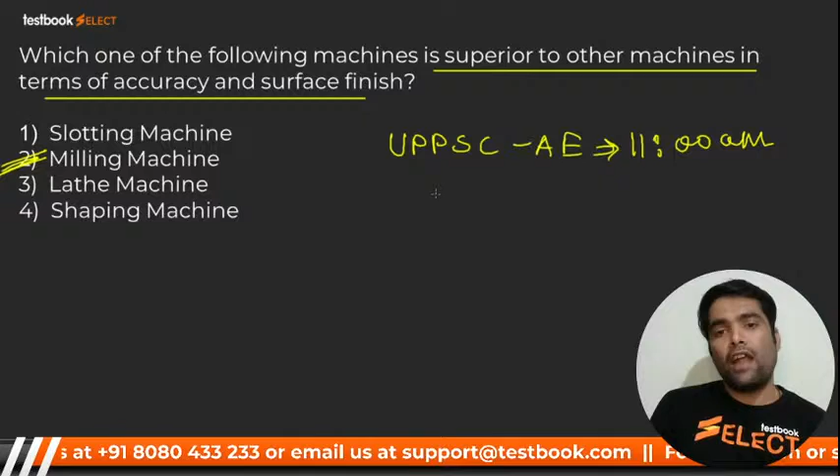Okay, so guys, here we have finished our 100 questions. So yes, if you have any kind of doubt, okay, yes.